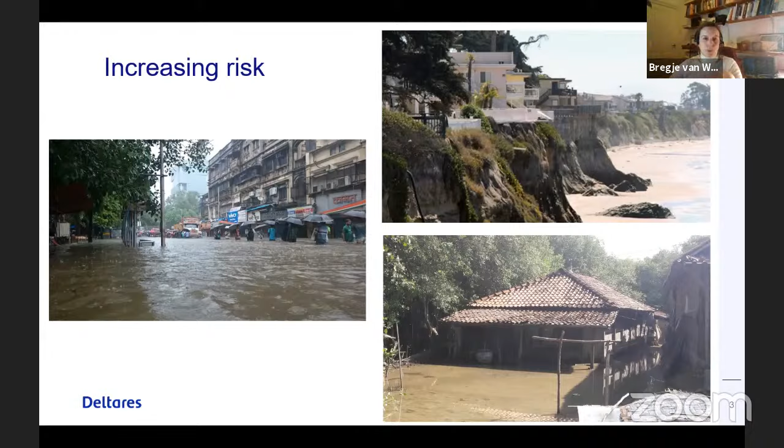I think it's sometimes good to distinguish also between, well, there's of course risk on flooding, fluvial flooding, so by rivers, coastal flooding by the sea, but also pluvial flooding, so stormwater running in cities because there's a lot of area that's impermeable. So different types of risk. Here I focus still on flood risk and mostly on waves and wave attenuation.

What is our response to risk? Well, of course, in the Netherlands, this used to be our first response to reducing risk, right? We would build seawalls, levees, dikes, and it's still what people think about when they think about how do we reduce risk, how do we keep ourselves safe and protect us against the water. That really used to be the Dutch sort of mantra. So we built these big seawalls, and this is more the nature-based solutions.

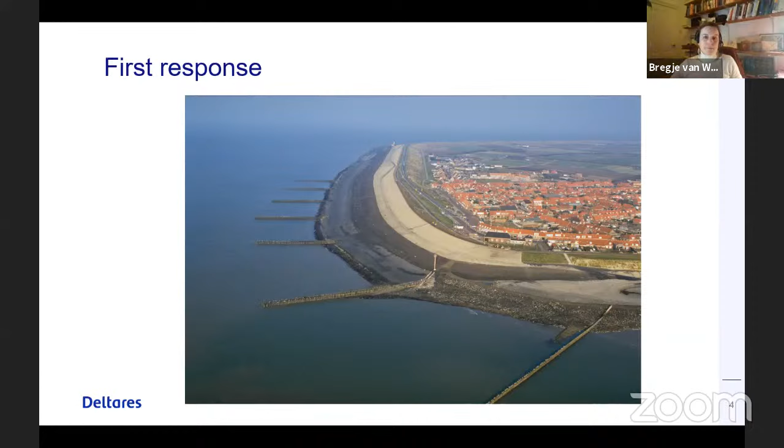And I think mangroves and tsunamis, for example, the debate is still out there what they do and how much mangrove do you need. So after the Asian tsunami, there were some science articles about it. But if your mangrove is not wide enough, villagers also get trees on their houses. But if the mangrove is wider, there is anecdotal evidence that they do protect villages against tsunamis.

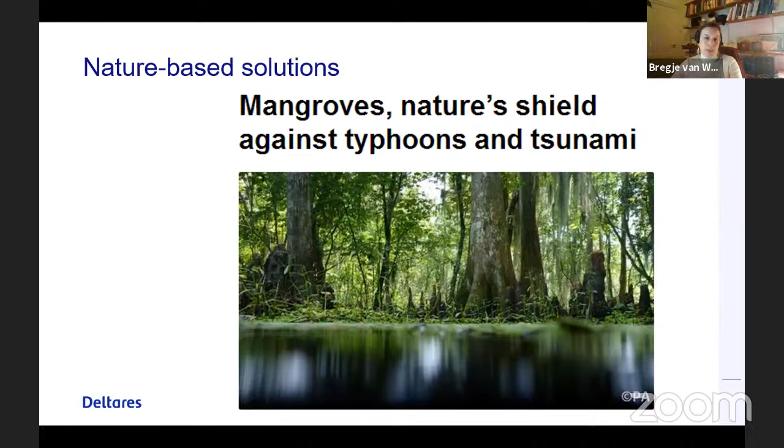There's good pictures that I could have put in, but if you look at what the Louisiana wetlands looked like after Katrina, I mean, acres of wetland completely disappeared. So to work with nature and to have nature as part of your coast or riverine protection strategy, we should really know what happens under these extreme forces with natural ecosystems.

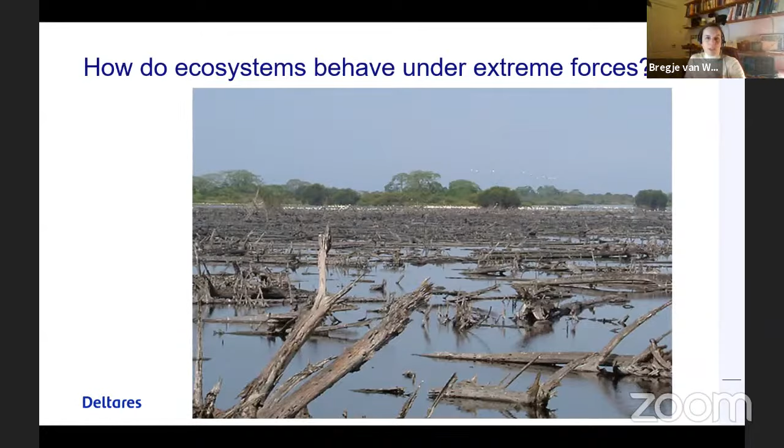And of course, this system and the Louisiana wetland during Katrina dissipated a lot of energy. So it did something that was beneficial. But like I said, only if it's strong enough so that those trees don't get thrown on your house, and if there's trees behind it, right? And we can calculate with this. And I think that is a challenge for the future that we're trying to solve.

So what started it when I started working in this field, it was basically that engineers said, well, these ecosystems, they don't do anything under extreme conditions. So for example, in the Netherlands, we design levees with a 1 in 4,000 year return period, or a 1 in 10,000 year return period sometimes. And we don't have field measurement evidence from those high return periods, right? Because they hardly ever occur.

So we start looking in the field evidence, and the field evidence out there was really mostly under benign conditions. So if we say how much waves can be dampened by a salt marsh, we look in the literature, and there were a lot of measurements, but they were with like 1 meter water, 20 centimeter waves. And then we would use numerical models to scale that up to more extreme conditions. So say, okay, then we use this dampening coefficient and we transform it to a 4 meter water and 1.5 meter high waves.

Now that doesn't work very well, because vegetation responds differently under a high wave versus a low wave. So what we try to do is use experimental evidence. There's a lot of experiments in small scale flumes that look at how vegetation behaves under waves, how it sways, for example. But those results are also, again, difficult to scale up. We don't know when it's uprooted, for example. You have to scale your vegetation. There's a lot of edge effects in these small flumes we're finding.

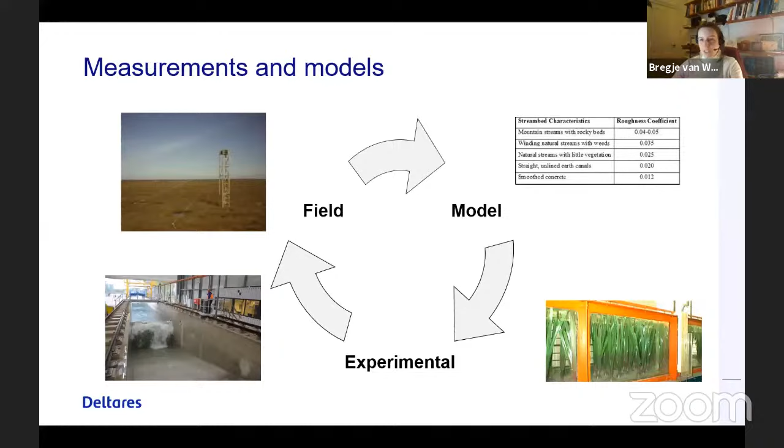So I will first tell a little bit about the marsh work, then a little bit about floodplain forest work that we did in these flumes. So this is one of the very first things in 2013. We did this for the Dutch Delta program, and one of our engineers modeled a marsh, and it's a funny marsh. It's a small marsh in front of a levee. It was done for the north part of the Netherlands, where we have several kilometers of marsh in front of our levees. And there's always a question, do these levees need upgrading? Do they need stone layers on top of it? Or is the grass layer enough?

And then we calculate with the marsh, but only as we have the input conditions for the hydraulic models, and they are taken on the marsh. So they take into account the elevation of the marsh slightly, but they don't take into account the last 100 or 200 or 300 sometimes meters that the wave travels over the marsh, and they don't take into account the vegetation. So in the beginning, the engineer said this marsh doesn't do anything. We don't need to account for it at all. And then we did a couple of model runs with more extreme conditions. So this is a 1 in 4,000 year hydrological scenario with high water levels, high waves.

And if you look at the lowest graph, yeah, I want to point at it, but I can't, of course. And you look at the top right of the lowest graph, that is basically a marsh of 200 meters long that extends 2.3 meters in elevation. And it still reduces, with a 1 in 4,000 year storm, about 30% of the wave height.

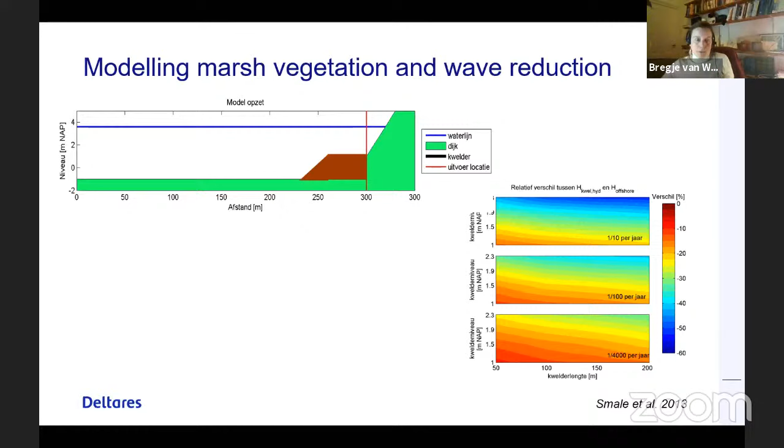So this is how we started out. Also, the same model was run where the marsh was like this body of sand, and they looked at, will this sand be moved completely out or not? But it stayed in place, and it took an equilibrium profile. So they said, okay, maybe then this marsh will likely also stay in place because it's more consolidated. So then we started really looking more into it.

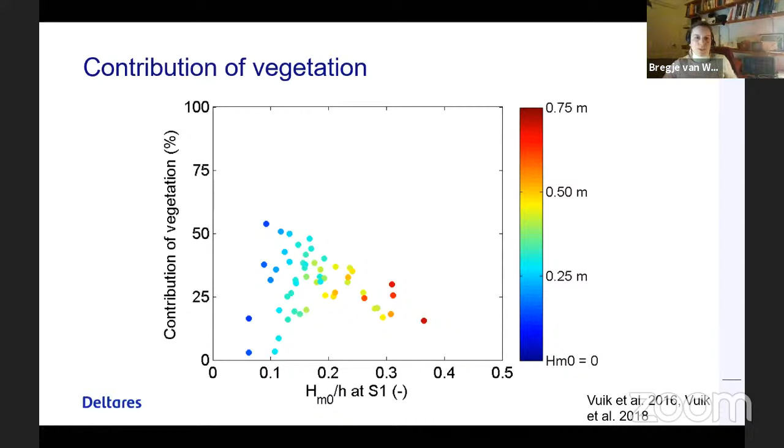Bregje, you should be able to move your mouse and it may appear on the screen, then you can use it as a guide. If not, I'll try to annotate as you speak. Do you see it now? No, I do not. Yeah, I can't. But I will try to explain then in words. No problem. I'll try to draw with you while you're talking, okay?

Cool. So we started doing these flume experiments. This was, I think, in 2013, 14. And we did this in Hanover with University of Cambridge, together with some German universities as well. And we got a marsh out of the field. There was a German project where they strengthened a levee and they had to widen it, so they were impacting the marsh anyway. And they gave us these marsh blocks, and we transported them to the flume.

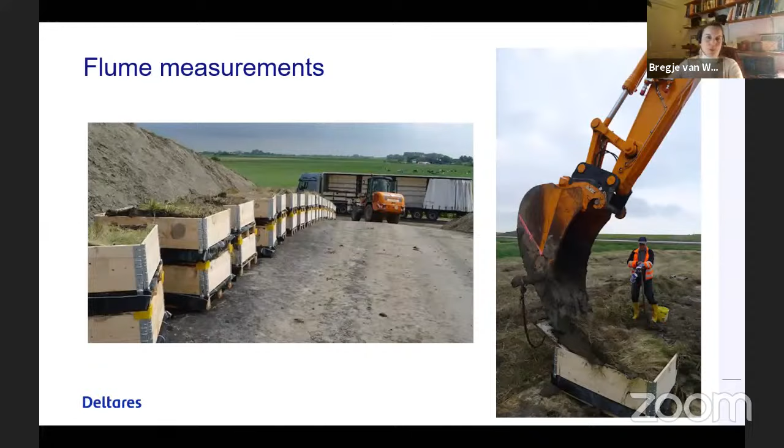And then we placed them in the flume. There was a sand body and a concrete platform and a sand body in the middle. And then they were glued together with clay, and they were just shuffled in there. The sides were removed. So we actually glued the marsh together. It was a 40-meter long marsh. It was a bit strange marsh. There was Atriplex on it that became really tall when it was still in the box. So you see that drifting up when we submerged the marsh with water.

And then we were able to test with some higher waves. We did waves up to a meter. It was the first time we ever did this. We were extremely afraid, because you have to imagine these experiments cost several $100,000s, up to $1 million, not calculating all the time, all the calculations, all the data processing afterwards. So this experiment only was, I think, about 400,000 euros.

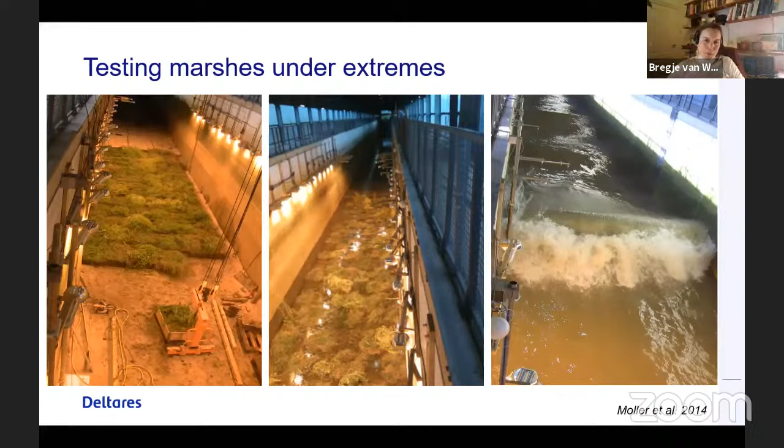So we were extremely afraid that you do the first run and that you remove a block, and then your full experiment is for nothing, but you've spent all the time in construction. But basically nothing moved. So we had some results, but I think that is why we didn't put the full pressure on it, which, in retrospect, is a bit of a waste. So here you see, we did waves up to a meter and not higher. I mean, we should just have killed the marsh in the last run or something, but we wanted to have a control.

And with your wave height, of course, also your period increases. So what we typically see in these experiments, once your wave length starts to be longer than the length of your vegetation test section in the flume, your effect is going to be really small. So that's why you want to have a long test section, because you can have higher waves with a longer period. And we basically also see this kind of shift where it doesn't flatten off.

And I think there's two things that could have happened there that we measured. Around 80 centimeter waves, this atriplex that had a woody stem and was floating was removed out of the experiment. So we lost a lot of biomass, which could have caused the dropping reduction. But what also happened is above 80 centimeter waves, the vegetation started swaying with the waves 180 degrees back and forth. So the drag on the vegetation likely suddenly then becomes lower. So it starts to sway, so there's less friction of that vegetation because it's completely flat. So that is what we measured.

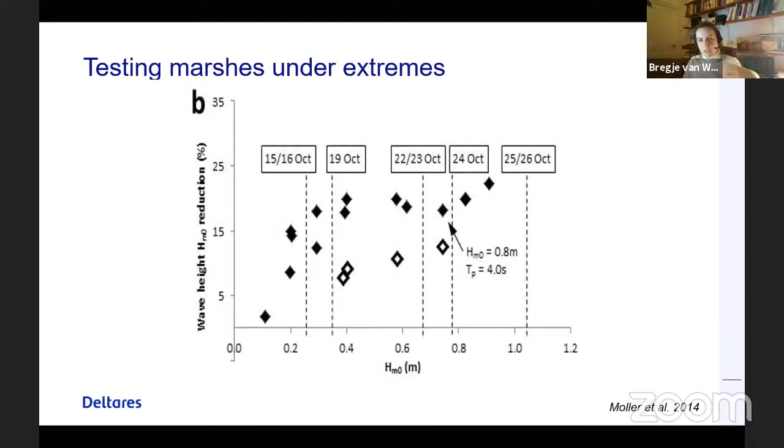So if we move on, we use these models to look a little bit at management regimes of marshes. Oh yeah, what's interesting to tell about the flume experiment still is we also measured the bottom of the marsh, and we didn't see any movement, so there was no erosion. So the bottom was well protected by the plants, and it stayed completely intact.

So here we did some work on management regimes. We did this together with people in Louisiana. And we looked a little bit at what does this vegetation contribute? Now we had better models, and we used these models to compare between the Netherlands and Louisiana marsh. And you see above in the Netherlands, we have, of course, more natural marsh. You see in the above picture in the back the more natural marsh with just higher vegetation. But we also have marsh areas that are severely managed and grazed. And we wanted to know, is there a difference in how much they reduce the waves, because those areas are in front of levees. And then below is the Louisiana marsh.

That's a bit different. So the above one in the Netherlands is man-made, created or man-restored marsh by putting brushwood dams there. And the other is a more natural but also fragmented marsh of Louisiana. And we compared, and you see the filled circles are the marsh in Louisiana. And you see there the wave reduction increases with the percentage land on the transect a lot. And you see for the Dutch marsh, they are really long, those marshes. So the percent land on the transect is larger, but the wave reduction is considerably lower because of the grazing.

So this is another illustration showing that the management regime of your marsh actually does matter, and the vegetation does matter, and the way you manage and maintain it does matter for your wave reduction.

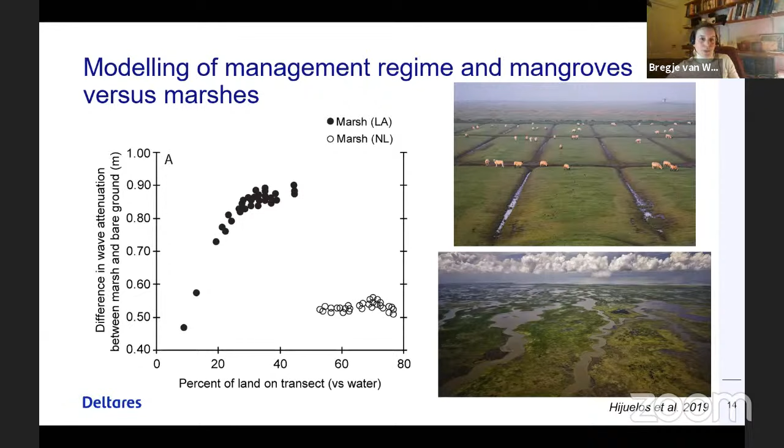Yeah, there's some historic evidence of marshes that we recently looked at, building this whole body of marsh work and what they do under extremes. There was a historian of the University of Antwerp, and he came upon some old maps from the Netherlands. And basically, if you look at very historic evidence, in the past, we used to build levees that were less strong behind marshes. So this old knowledge has been there, and we've forgotten it, and the Dutch engineers have forgotten it somehow. So we wouldn't strengthen our levee all the time when it was behind a marsh. And then he found old maps where you had all the breaches during two floods, and it was the Elizabeth flood, we call it.

You see the number of breaches per kilometer dike, and then the marsh width in front of the dike. So you see the longer the marsh is, there's a large reduction in number of breaches in these historic floods. And then you see the marsh width in front of the dike, and you see the total breach width. And the total breach width actually is reduced a lot when the marsh is wider.

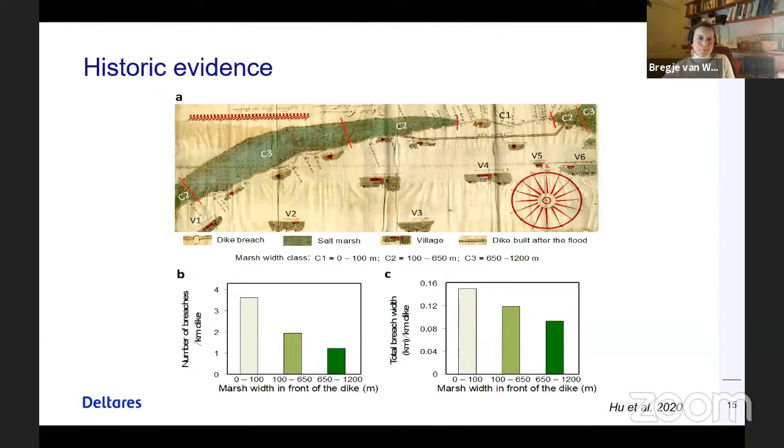So moving to woody vegetation, well, we had these experiments for marsh vegetation, and of course the main thing of marsh vegetation, what also makes it difficult to put it in numerical models, is that it's flexible, and that this flexibility and the movement of flexible vegetation changes with your wave height and your wave period. So how much it sways from one side to the other. And that influences how much it attenuates, how much the percentage of wave attenuation is in the end.

So this is a case where we implemented actually some natural design in the Netherlands very recently. It was part of the Room for the River program, and in the back you see the old river. In the front with the green lines around it is a fortress. And that fortress, the dike used to be actually alongside of the river. But then for the Room for the River program, they needed to depolder to actually lower water levels in this river.

So they depoldered this area, and they had to build the inner dike around this fortress area, but that was a high-end real estate. So there were kind of rich people living there. They said, we don't want a levee in front of our fortress. It will spoil our view. That fortress is a historic part of the Dutch waterlinie, we call it. So it's a protected historic landscape.

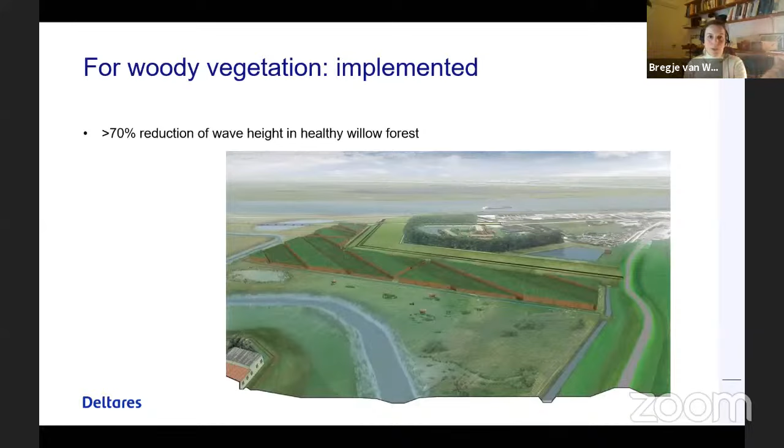So what happened in the end, it was a bit over-designed. There was 20 centimeters taken, and they made the overtopping safe levee. We had 2 species of willows there, I think against pests and stuff. Basically this is now constructed in the Netherlands, and it functions and it works like this. And this polder was, last autumn, full of water.

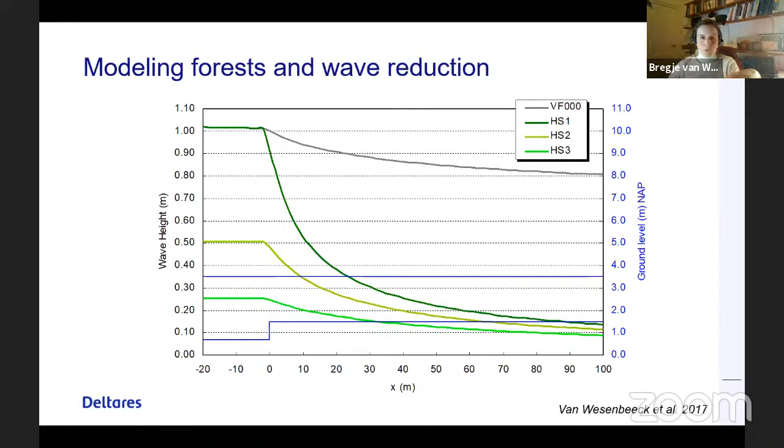And then we implemented it already in reality, but we never did any tests with willows. So we figured that's what we really would like to do, test it with willows in our flume. In the meantime, the first marshes were in Hanover, but in the meantime, we got a new big flume in the Netherlands that is still the largest flume in the world now, but I think Hanover is now upgrading its flume, so they will probably be a bit larger again.

It's the race of the flumes. It's a bit pathetic. I think there's longer flumes in the world, but we can make the highest artificial wave, and I think we can make a wave of 4.5 meters high. But that is not a nice wave for testing, actually, because that is a wave that's constantly breaking.

So what we did is I was in contact with somebody who grows willows, because we still use willow branches for making these sort of pieces that we use in civil engineering construction below water to stabilize the side of canals, for example. And he wanted to get rid of these 15-year-old willows, so they brought them to Deltares, and here they get towed off the truck.

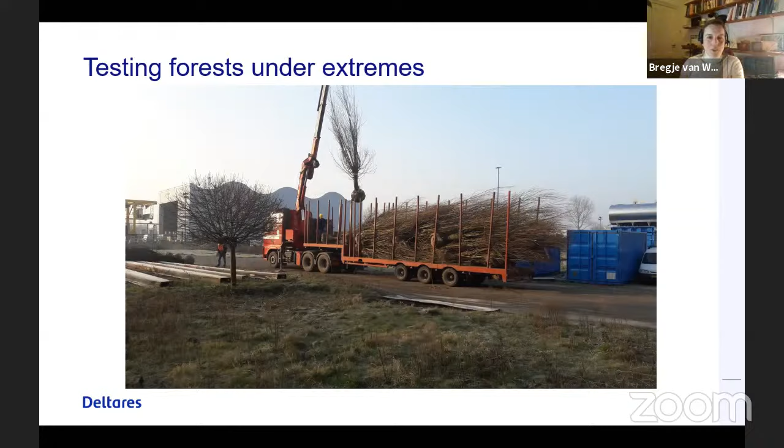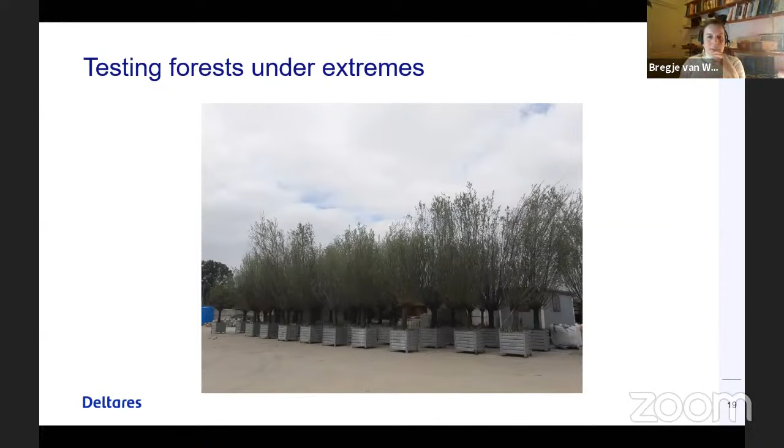They actually had this machine to cut them out. So then we planted them in these boxes, and they sprouted again in spring. And then we placed them in our flume. So our big wave flume is, I think, 300 meters long, and it's 5 meters wide and about 9.5 meters deep.

And it has a wave paddle on one side, and that paddle moves back and forth, and that generates a wave. And then in the back, we have a slope now, but that's a constructed slope, so we can move it if we want to. And what we did with the willows is we first had the wave coming in, then we made a platform with a really gradual slope. Then we had about 20 meters with no willows, so that the wave could sort of get used to the bottom. And then we had 40 meters of willow forest, 32 willows in there.

And they were put like this in sand, and they were topped off with concrete. So we're not looking at uprooting of the willows, but we topped them over to make them stable. And again, we didn't dare to put maximum pressure on there. I will do that the next time. So this is what it looked like when they're underwater. We had 2 water levels, 3.5 meters and 4.5 meters on top of the platform with the willows on it. So we could also do slightly higher waves.

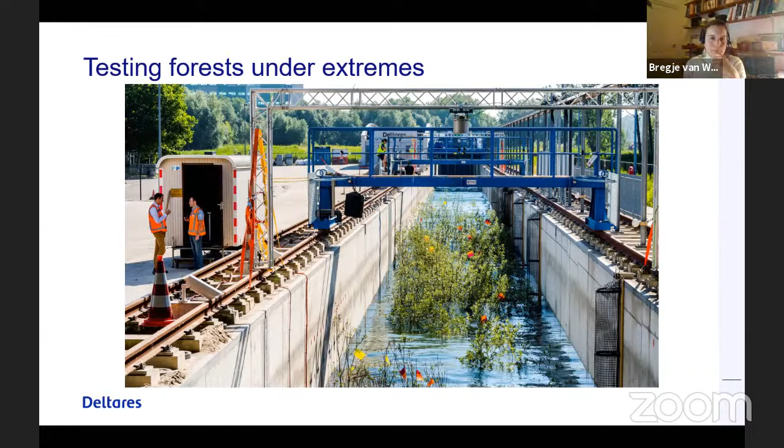And we tested with leaves, without leaves, with half of the branches, so we reduced the biomass, and a control without the willows. So we actually had to cut them all down in the end. And we de-leafed them manually, because people want to know, is there any effect of the leaves? Nobody knew, and we have the main storms in the winter, and then there's no leaves on the trees.

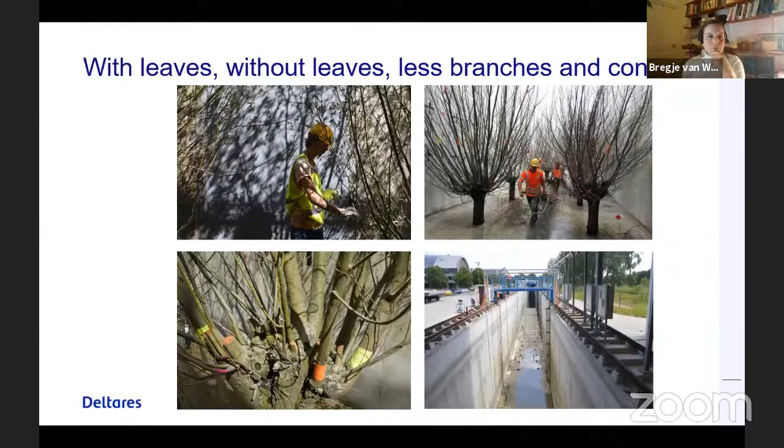I'm going to show you something of the experiments, but I'm not going to show you all the graphs with results, unfortunately. There we go. This is with 3.5 meters. So the wave travels through the canopy, and you see it already starts to sway slightly.

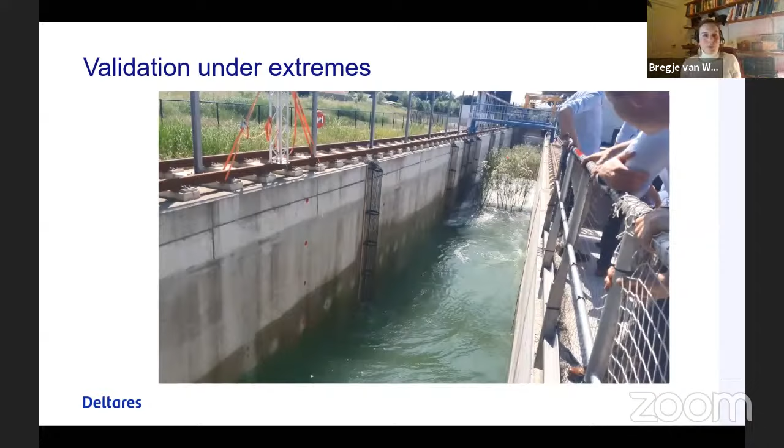And then after we de-leafed them, we actually started to do higher waves. What happens is if we put in a wave height of 1.5 meters, that's the average wave height, so it creates a spectrum with different wave heights around this 1.5 meters. So I think the maximum wave height we had in here was about 3 meters in this spectrum. But the average wave height of these runs is 1.5 meters.

I think the waves that you see here are a little bit higher, and they're the high end of the spectrum, look. And what happens here, look, with the branches.

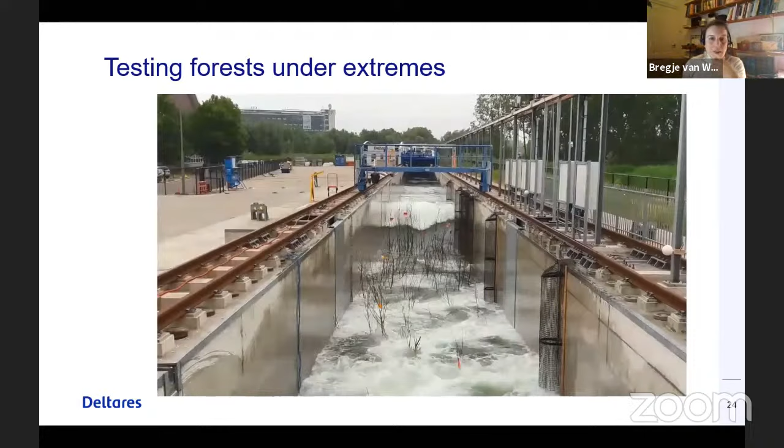So now the water level is 4.5 meters, and the waves, you see some of them are breaking. So it means they're probably around over 2 meters or 2.5 meters, because they start feeling the bottom. And you see that the branches now start moving again 180 degrees. So we also find a big reduction in the attenuation of the waves where this happens.

So I can show it again, and they're wooden branches basically. So it was not something that we really expected, because they look really rigid, but still they jump out again when the wave has passed by. So we see also a big reduction in the wave attenuation when this effect starts to occur.

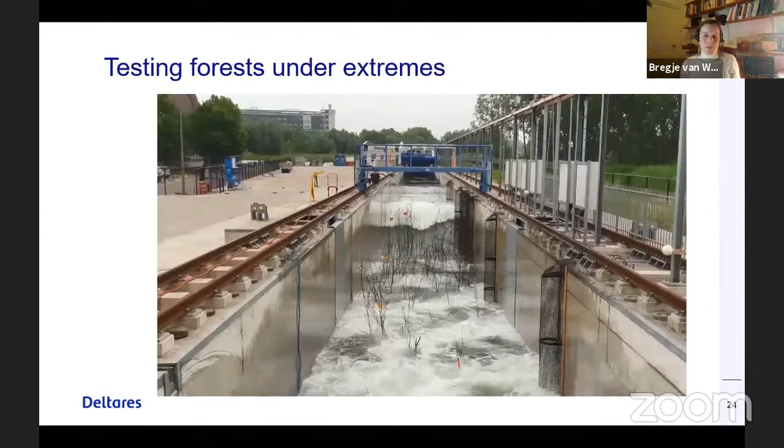And basically what we find of these experiments are, and we still need to publish it, but we're an applied research institute and we don't have time for publishing, and we're not too good at it, I have to say.

The wave reduction, what we found, is strongly dependent on the wave height and the wavelength. That's nothing new, because we knew that and we expected it. But it's also strongly dependent on the water level and in relation to the surface area it meets. So if the water level is 3 meters, then the wave runs through the most dense part of the canopy and we get most reduction. If we put that at 4.5, the wave starts running through the top and we get a lot less reduction.

And what we found when we looked into our numerical models and we tried to validate this study is, in the numerical model, the vegetation is represented as rigid cylinders. And these cylinders don't have side branches. So we actually found that we underestimate the whole biosurface area of a tree.

We didn't find any effect of the leaves. That could basically be neglected. When we removed the leaves, the attenuation was slightly lower. But it would be interesting to test it with another species that has larger leaves. These willows have tiny leaves that will just lie flat with the main wave direction. So the representation of surface area is key.

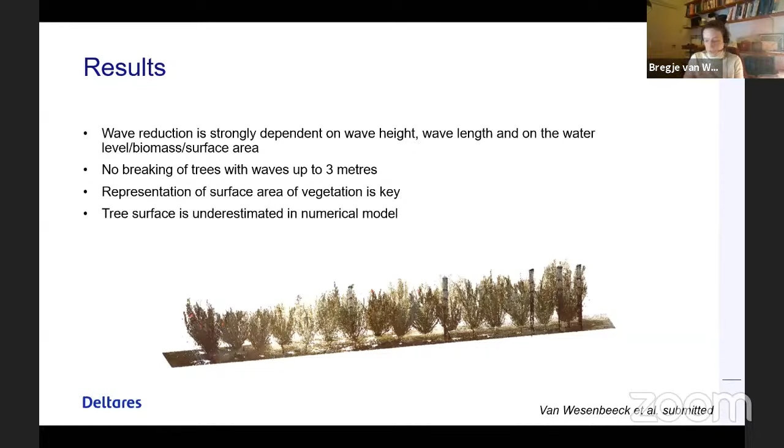We had a terrestrial laser scanner where we actually captured this whole forest. Next time, I want to redo it, of course, and I want to measure every tree, every branch. We didn't do that yet because we were sort of hurried. This flume is planned, it's squeezed in. The planning is very crucial, squeezed in between two other experiments. We had too little time.

Okay, what do we use the data for? Well, that is what we already did, because we cannot sit on data too long and it needs to be flowed down and help people actually. So what we want to do is validate the numerical models. That's what we already did, and propose new equations for how we include vegetation in these models.

And what we also want to do, because we're a research institute, is embed the knowledge in design guidelines so that we can design better combined vegetation levee systems in the future. And then we want to use the knowledge to influence policies. For example, one of these policies is the greenbelt policy that they have for mangroves, where they say that a greenbelt should be 100 meters wide, but with 100 meters, you have not reduced a wave of 2 meters significantly.

So I think it should finally flow in there and result in either the greenbelt policy changing to wider greenbelts, or that there are no false promises about how much that mangrove forest can reduce waves. But it would even be better if it leads to these combined designs, so that people with a mangrove forest also get some kind of small levee behind it.

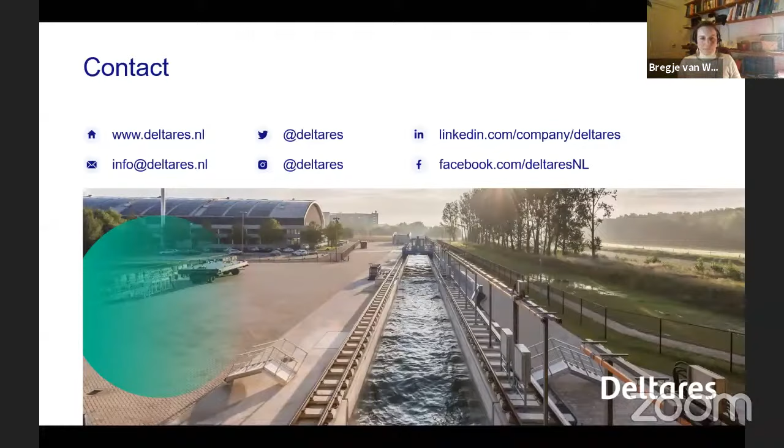So we'll open it up to questions both in the Zoom room as well as we got one from YouTube. So I'll start with the question we got from YouTube, sort of technical. Scott Wassman asked, do the models that you're running use regular linear wave conditions? Yeah.

Well, I think, yeah, we have two models, SWAN and XBeach, that we actually validated with these data, both the marshes and willows. And I think both models are based on linear wave theory, and vegetation is included by the Mendez and Losada vegetation equation.

All right, and a couple of questions coming into the chat. So Katie or Danielle, would you like to ask Dr. van Wesenbeeck yourself? Okay, so Katie, if you want to start. Sure. First of all, thank you. That was really interesting. It's really, really cool to see what you're doing.

With the willow tree flume experiment, you described that you put concrete down to prevent uprooting. Obviously you didn't get to test that, but how likely do you think uprooting would be an issue if you were able to mimic natural, normal root situations in dirt?

Yeah, good question. We put a lot of force sensors in one tree, so we could measure all the forces in the tree, on the branches, on the stems. And now one of the PhDs is doing uprooting experiments by pulling on willows and also on mangroves. She already did a lot on mangroves, actually, pulling over mangrove trees. So we hope to translate forces on the tree to uprooting experiments and get more insight in what you're asking.